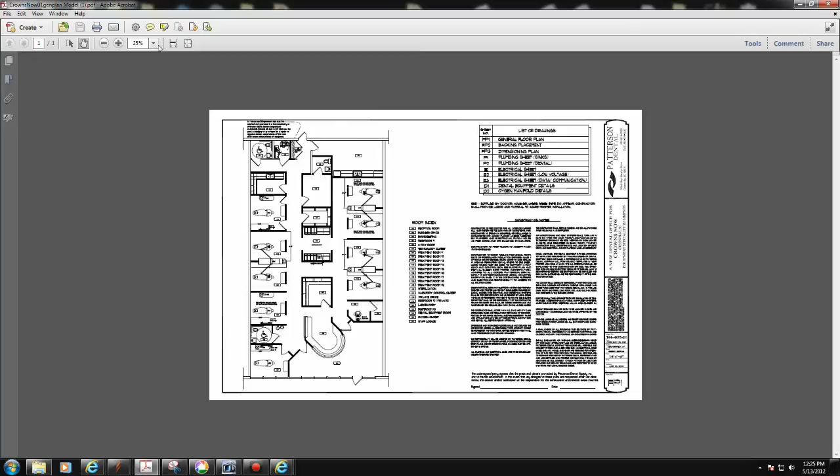what I use. When you get a job, you're going to get a set of plans from an architect, hopefully, unless you're designing it. So what I'm going to do today is show where I received a set of plans from an architect for a dentist facility, and basically what we're going to work on today is this radius front desk right here, and how

to fabricate it. One of the issues and why I want to pre-make this desk before they put the walls up is, if I got nice straight runs and angles, and if you can't do nice straight runs and angles, then find another trade right now. But in the area of radiuses, this is where the CNC really excels.

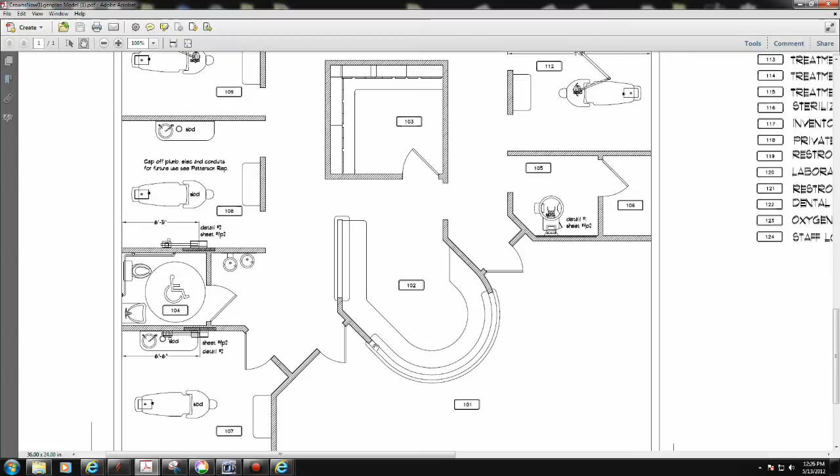But if you notice, this little wall comes out right here and then begins the radius, right? And so, how are we gonna do that? Get it perfect, get it in on time without a lot of scribing. How can we pre-make it in the shop, and so forth. So this is the floor plan, and shows the countertop, the upper top, and the rest of the countertops in the wall that it will match into this area here.

At that point, I go back to another plan, or the second page, which is the dimensions drawing. Let me move it up here where you can see it, and you'll see that the wall where it's going to marry to here is a 5-foot radius, and that's the magic number.

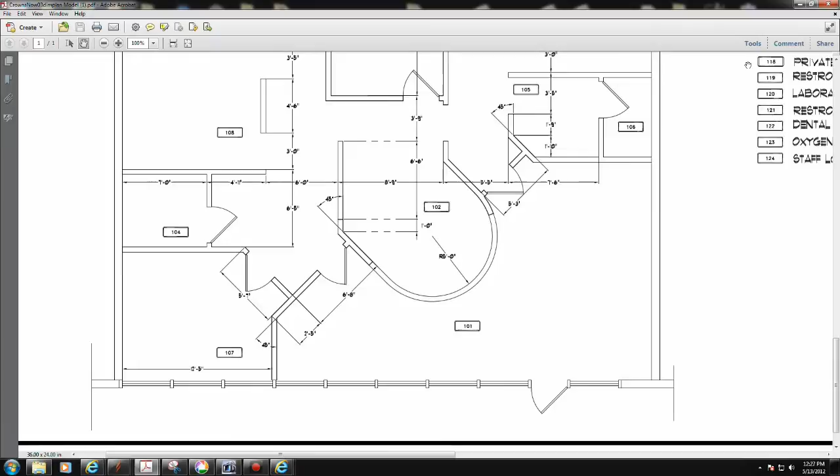Now at this point, you can call the architect and ask them to send over what's called the AutoCAD drawings in their language, sometimes known as the DXF or the DWG files. And if you get those, you can use them to use that radius, but it's really not that difficult to do it in Aspire now that you know the radius. Again, because I am setting the standard here, what I do is call up Aspire, and we'll bring it into the program here.

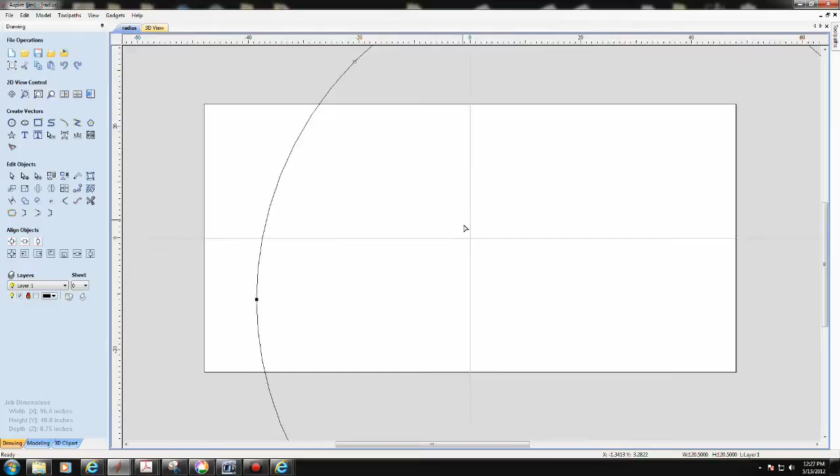And if you can see what I've done, basically I go in and I just start a circle with a 5-foot radius. You can see it over here on the left hand side. I create that, and just to show you how I do it, once you select those vectors, that's what those little red dots are there. And I'm no engineer, so I don't know how to explain all this, but it's basically the language that tells something where to move on a screen.

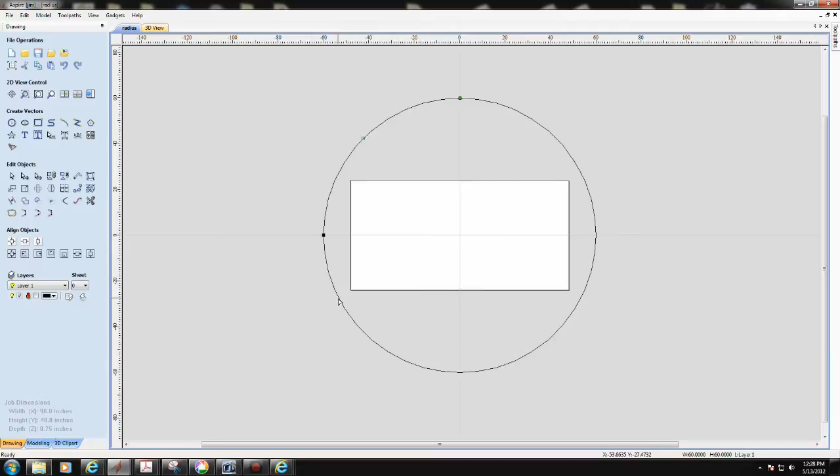I go into what's called node editing, which you'll see has divided that 10-foot into 4 parts. And I'm going to cut one vector there, cut one vector there, grab the rest of it and delete it, and then I now have a radius. We know that that is our 5-foot radius right there.

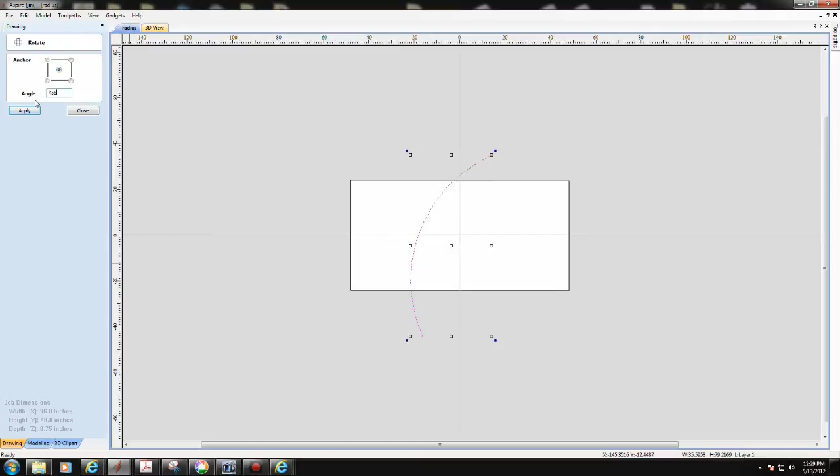So what I'm going to do at this point is to turn and rotate that. Whoops, that's not my rotate button. That's not my rotate button. I'm going to rotate it 45 degrees, and I'm going to spin it around until I get it where I want it. Okay? And now, that would be the inside profile of a 5-foot radius in that counter.

And by the way, the white area that you see on the screen is typical of a 4x8 sheet of substrate, in this case plywood, which we would use for the top and bottom plates and the substrates of the countertop. I'm going to take that 60-inch radius, and I know that my countertop will run basically 25 inches in of that point if it were scribed to that point. So remember, this is your baseline all the way through this thing. This is going to be your baseline.

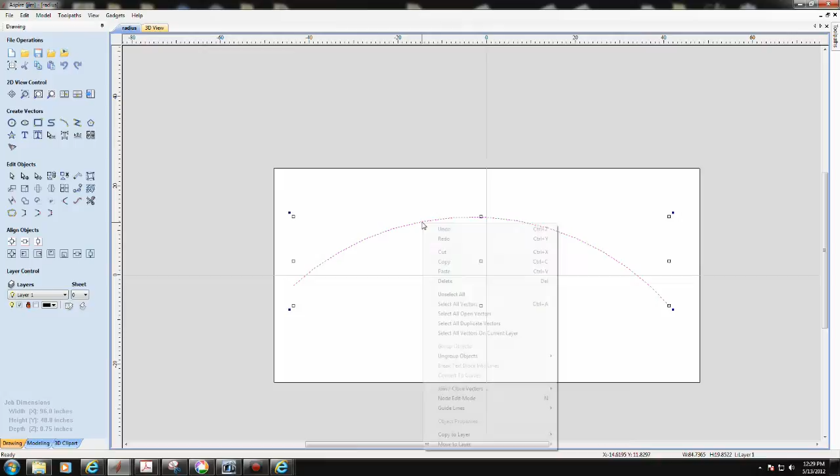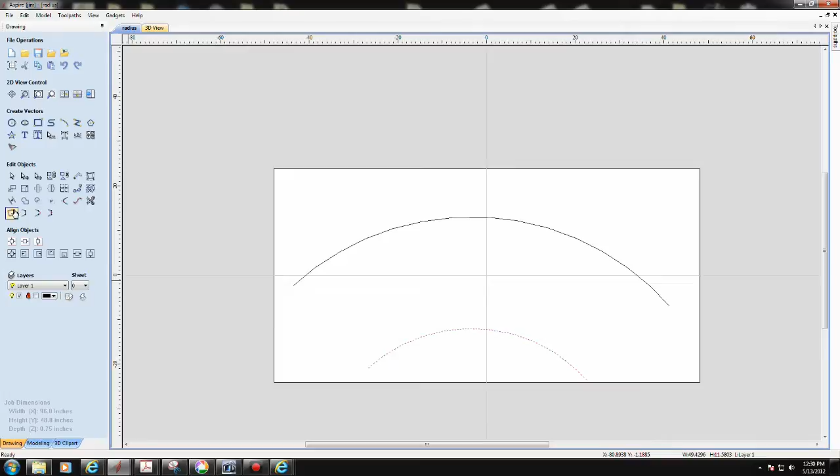And what I'm going to do is I'm going to take that line, and I'm going to do what's called an offset, and I'm going to set it in 25 inches. Now what you've got is a 25-inch slice out of that plywood, and by taking that piece there and now moving outwards 3 inches,

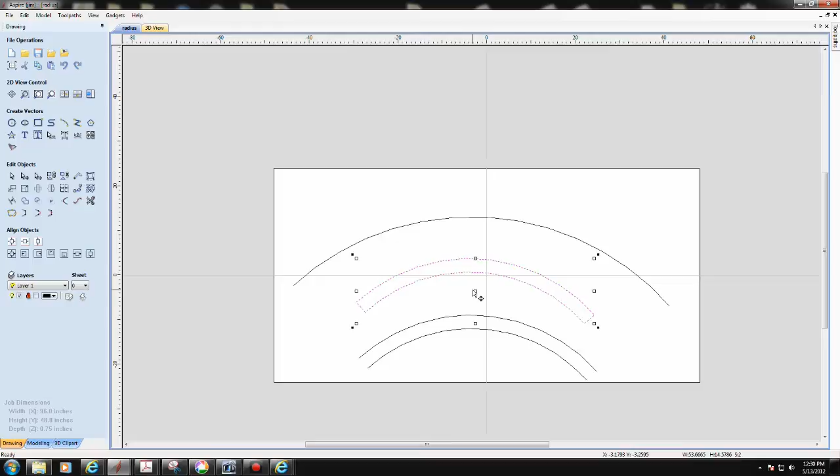I can take those 2 vectors, copy, paste, and move them up. At this point, I'm going to use a little connection tool. If you notice, what I did was I just connected the vectors on the end, and I've basically just cut the piece which will be the buildup on the inside of my countertop. I'm going to set that off to the side.

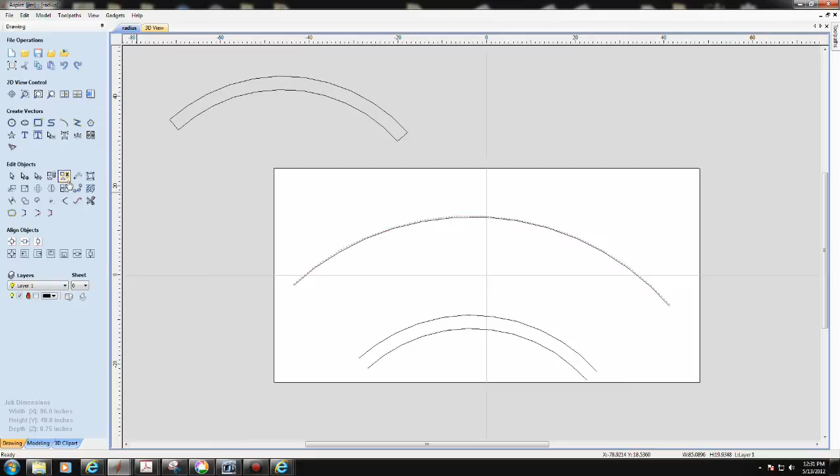And now I'm going to take this one and I'm going to do an offset outwards of 0.25. Why 0.25? Because that's the thickness of the skin on the inside of my wall. Okay? Now I'm going to take that one and do an offset of 3.5 inches. And again, I'm going to capture that. And I'm going to connect 2 ends.

Grab that part and pull it off. That is the top and bottom plate of my wall. Okay? Now, if you remember, I still have this one, so I'm going to do one more thing, which is to do an inwards offset of 3 inches. Whoops, that's not what I wanted to do.

I did not mean that. I'm going to go back here and hit undo and not close that vector. I'm going to take that right there and go back and do my offset of 3 inches, close, catch that part, connect it, and that part is the buildup of the inside of my countertop, which goes with this part over here. And I'm just moving them off the screen right now.

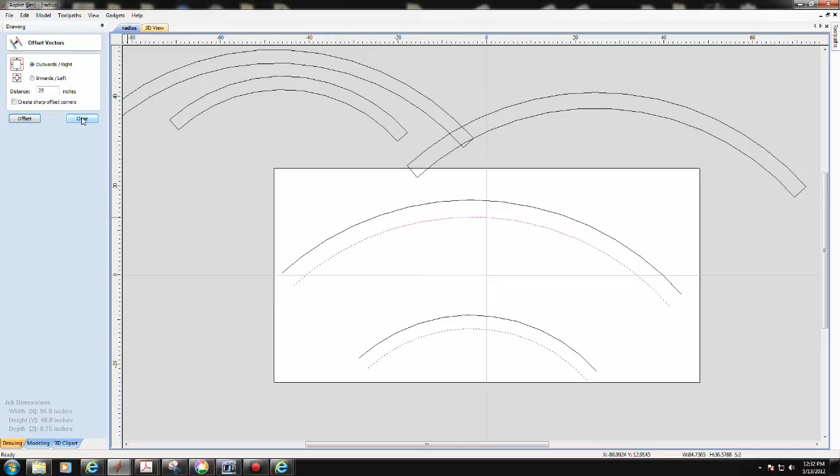At this point, I don't need this one. Well, yeah, I do, because I take this one, which is my outside, and I move it outwards 0.25 inches again, because I used my part. Okay, I grab that one and connect them. And I'm going to move them out of the way temporarily. I don't need these anymore because they were basically guides. And what I've done is I've created the vectors for my parts.

And at this point, I'll go through this with you. Let me just move that one out of the way so I don't conflict with anything right now. At this point, I'm positioning this on my sheet. And I want to optimize and get all I can out of my sheet of plywood. So I'm going to see if I can get a full, yes I can, by positioning that on the table there a little bit. I can get one part of my wall built.

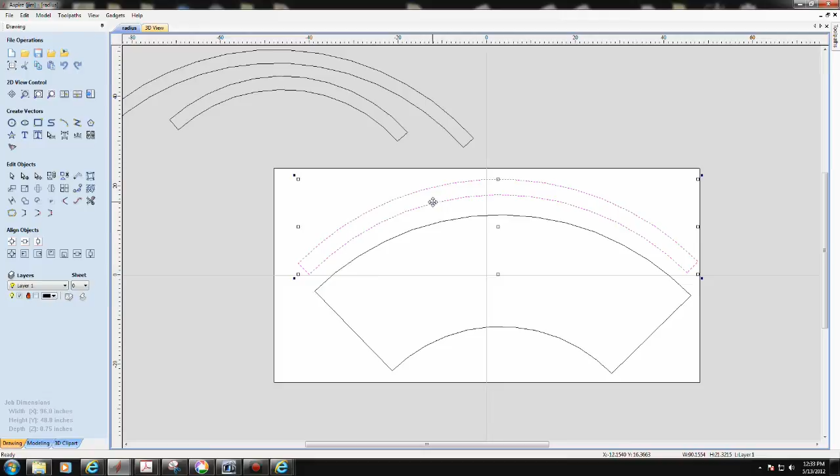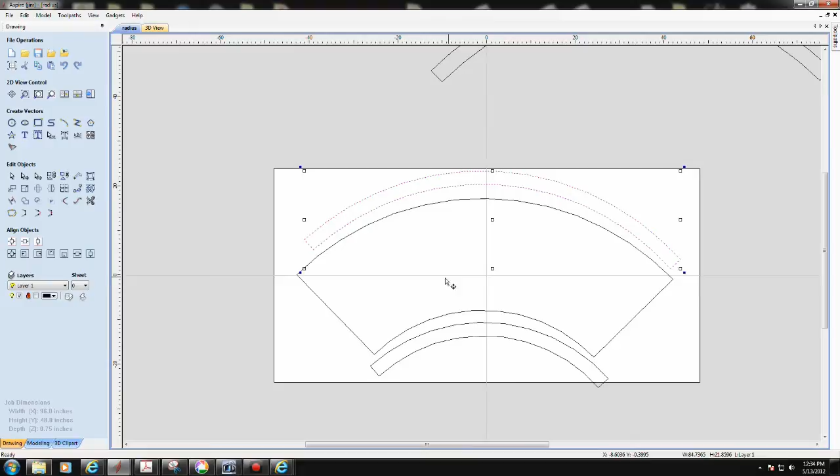And actually, I think what I like better is doing all 4 parts of my wall on a separate sheet. Because I can see how, if I put this in the center, and I bring my inside buildup in, let's see if I can position them a little bit so I get a good nest here. That's about as tight as I'm going to be able to get that. And if I spin that up a little bit, I believe I can get all 3 parts on a sheet.

At that point, you back into your CNC, I go into tool pathing, I pick a profile cut, I want to cut through at 0.755. For the sake of this demonstration, I'm just going to use a 1/4 inch end mill, and I'm going to select the pass depth at about 0.25, so it'll cut through in 3 passes, just for the sake of an argument. And that's in tool pathing and all that, which you'll learn more about.

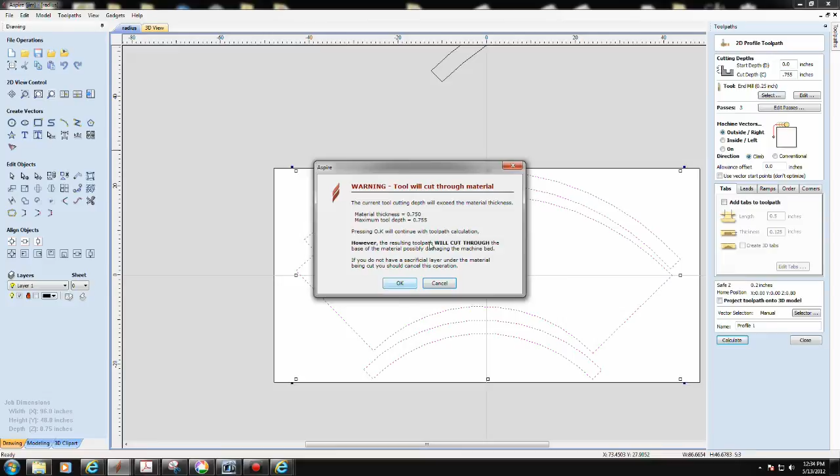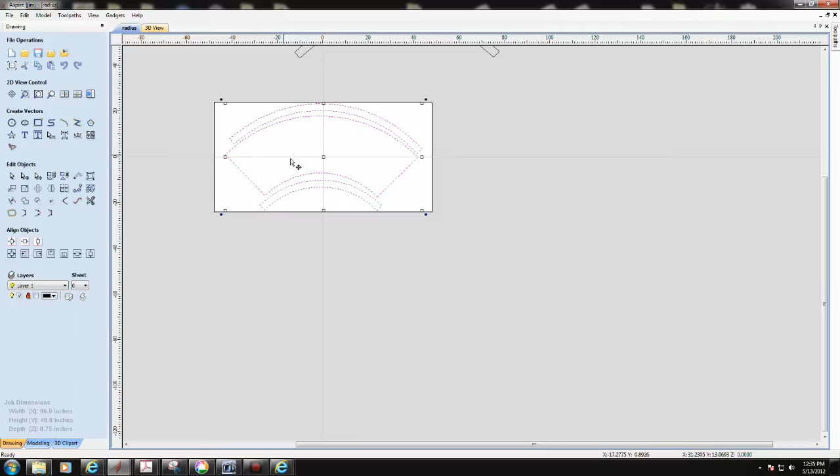To go back real quick and just move those out of the way and go back to my wall parts, which I need 4 of. I go to 1 sheet, and Aspire has a nice little function here called copy and array or nesting. You know, a lot of ways to do it. I'm going to use rectangular array.

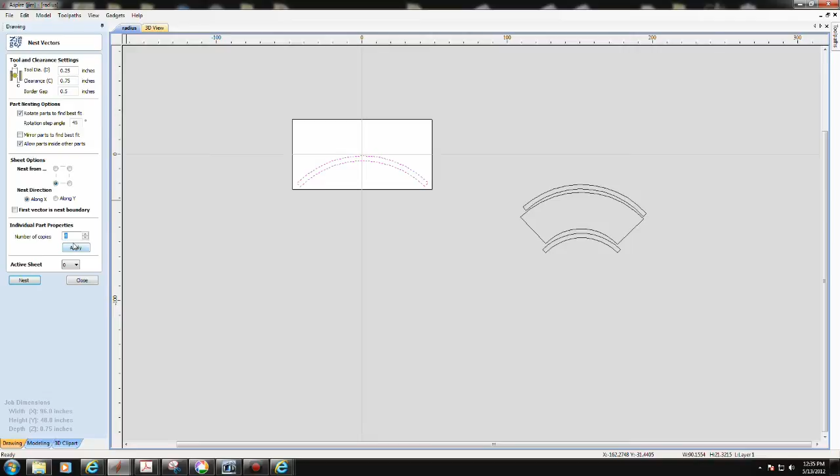I want, let's see, I might be better off to do this with nesting. If I pick a nesting, I need 4 parts. Looks like everything's good. And there are my 4 wall plates. Missed one in my grab. And again, I can go in and I've already set my toolpath, so I simply calculate and it says it's going to cut through it.

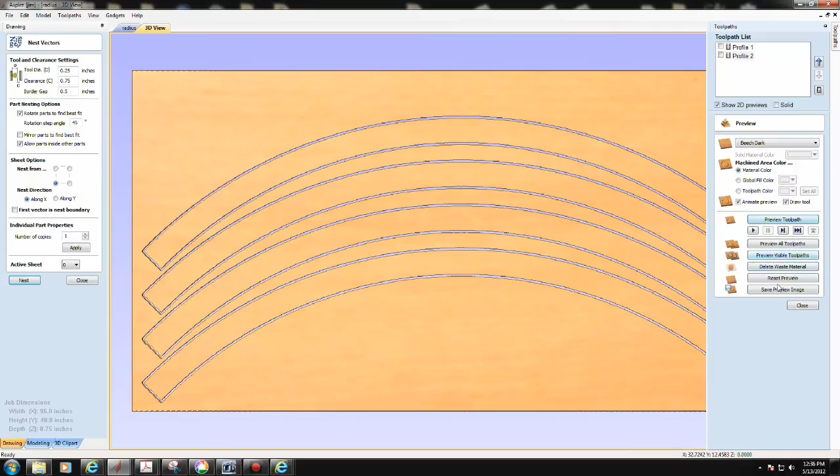I reset the preview. I preview all toolpaths. Of course, it's cutting them all now because I've got both toolpaths turned on, which is not what I wanted to do. So I'm going to reset the preview, just pick profile number 2, preview that toolpath, and delete the wasted material. And there are my 4 top and bottom plates for my wall, which make up the entire radius of the wall. At this point, I'm going to show you what that looks like when you get it done.

We basically leave this in the field for a few days while they get the framing married up to it so that we get a nice marry up. We come back and we get it, or you can just trust them and leave the lines on the floor. But I wanted nice flat walls to look real good. Want a very beautiful job. I like doing things once the right way. That $60 trip to send somebody out there to set it up is worth its weight in gold in the value of a completed job with no punchbacks, no hours of scribing. Everything just bolts together in the field.

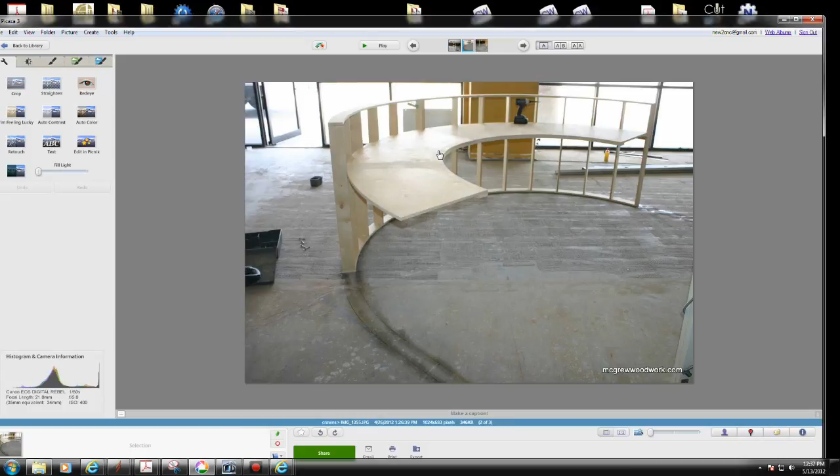I hope this has been helpful, and that's a little bit about how I use Aspire to make parts in cabinet making. And maybe today I'll try to get into arches and some other things.